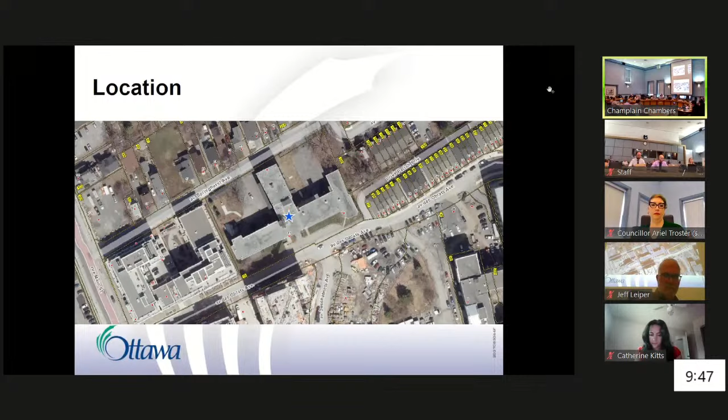In terms of zoning, the property is split zoned as R4 UD with exception and holding symbol, and R5B with exception and holding symbol as well. This split zoning reflects the Old Ottawa East secondary plan's height schedule, ensuring proper transition to the properties to the north. The R4 portion permits a low-rise apartment building, and the R5 portion permits a mid-rise apartment building with a maximum height of 6 stories.

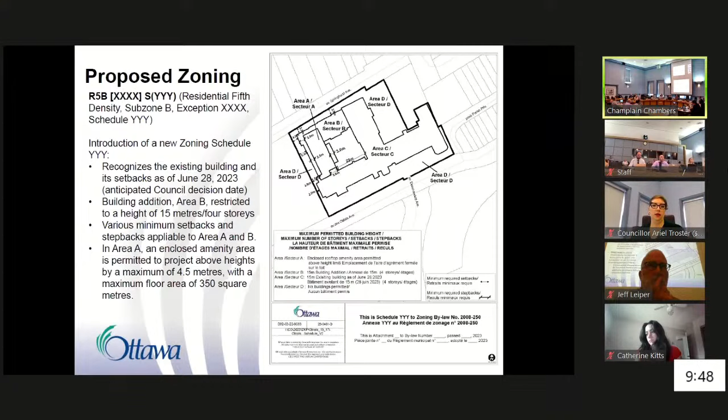The proposal includes redesignating to the closest fitting zoning, which is R5B, with an exception and schedule to regulate height, setbacks, and stepbacks.

The schedule will recognize all setbacks of the existing structure, shown as area C in the graphic. It will introduce the building addition shown as area B and under area A. The height of the entire building is a maximum of 15 meters, equating to a 4-story low-rise structure.

Area A is meant to demonstrate the permitted location of the proposed enclosed amenity space. The intention is to allow the amenity space to project to a maximum of 4.5 meters above the 4th floor, to a maximum floor area of 350 square meters.

The setbacks and stepbacks of this structure ensure that the rooftop structure is inset, reducing the impression of a larger building from the street and providing approximately 8 meters of separation to the western lot line, and about 10 to 11 meters of separation between the existing building and this rooftop structure.

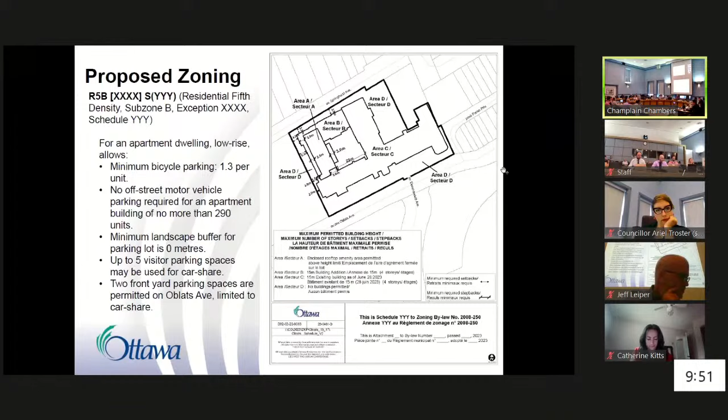The site is designated as neighborhood low-rise and neighborhood mid-rise within the Old Ottawa East Secondary Plan, Policy Area 3. This policy encourages a variety of residential building types and tenures, complementary building and landscape design, with an emphasis on appropriate transition to the low-rise residential neighborhoods to the north.

It is located within the urban transect policy area of the official plan, which encourages a more urban, mid to high density style development. It is also within the evolving neighborhood overlay, which supports low-rise intensification with a focus on supporting a 15-minute neighborhood. I've also included reference to an important section of the official plan that seeks to encourage the shift to a more sustainable and active mode of transportation.

This formed a crucial part of the recommendations for the reduction in parking on site. In essence, the policy states that we shall support active modes through reductions, and in some cases outright removal, of the parking requirements for sites within 800 meters walking distance to a transportation hub. In this case, the site is within proximity to Lees O-Train station.

Here is the current iteration of the site plan. The proposal is for the adaptive reuse of the former convent building and a 4-story addition on the northwest corner of the property, to allow for a 284-unit low-rise rental apartment building.

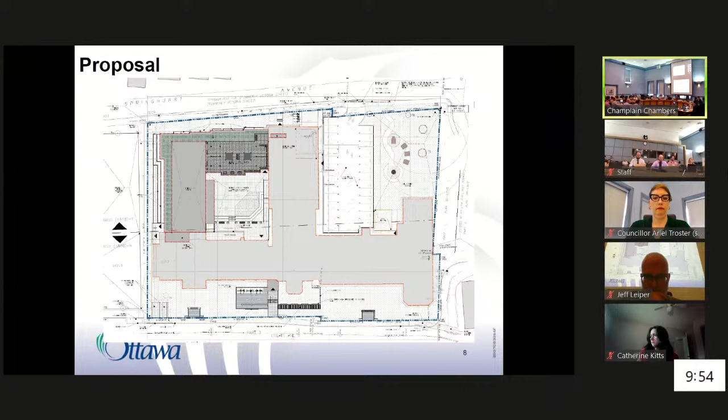There's a mid-block connection also located along the western property line, something the community was asking for and is being provided. A public park will be secured through the following site plan approval process, the design of which will be subject to further public participation.

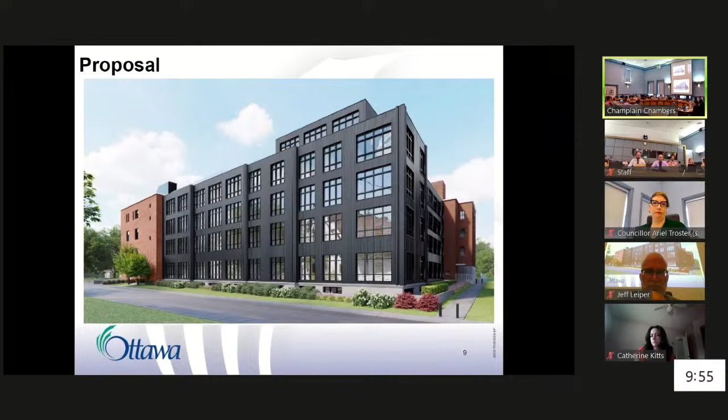Here's a view of the building addition from the Springhurst side, looking southeast, offering a good view of the mid-block connection leading to des Oblats. This perspective also shows how the amenity structure will look from street level, being set back quite significantly.

The applicant and ownership team has agreed to a comprehensive transportation demand management strategy meant to encourage alternative modes of travel, to offset the pressures that would be caused by not providing any parking. These measures include a bike parking rate that exceeds the number of bedrooms at 1.3 spaces per unit, 10 bicycles available for rental, and a preloaded Presto card for tenants upon execution of a lease within the first year, the value of which will allow for a monthly pass and also cover the cost of the Presto card itself.

A property manager will be available 24 hours a day to monitor the visitor parking lot and offer concierge service to residents for travel directions and advice. There will be 2 permanent car share spaces on des Oblats, and the ability for 5 of the visitor parking spaces to be used for car share on a need-to basis.

Finally, there will be a notice, something that's standard within our site plan agreements whenever there's parking pressures or reductions in parking — a notice in each lease agreement notifying tenants that parking is not available on site and that on-street parking is not a viable option for them.

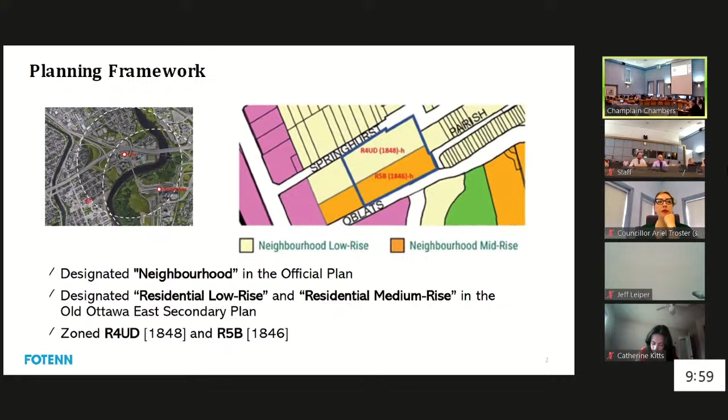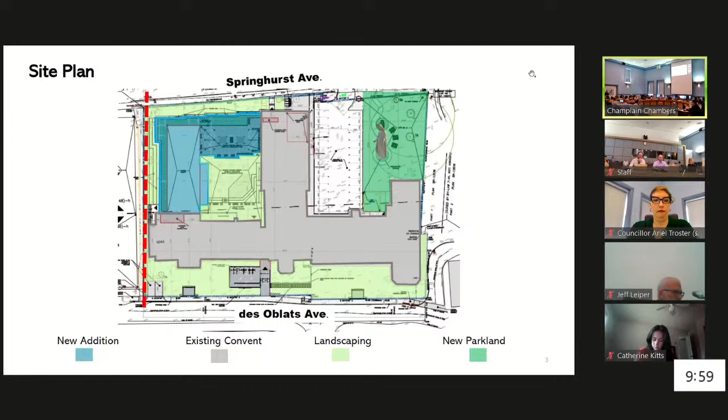The zoning amendments requested today will remove the holding provisions and create a site-specific zone for this project, one that recognizes the uniqueness of this redevelopment. The site will no longer be dual zoned and a park will be set aside as open space. The proposed building setbacks consider the existing setbacks of the convent, and the addition aligns with the current requirements of the R4 UD zone, which is what's in place today, where a side yard is supposed to be 1.5 meters. The addition is set back 4 meters.

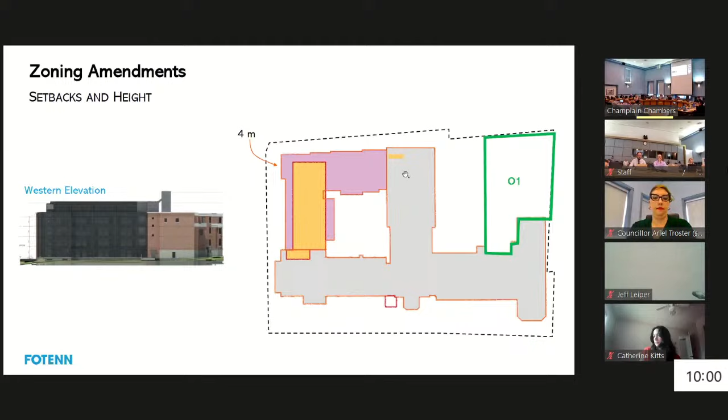John did go through this. These are the parking TDM measures, so I visualized it a little bit on this screen.

But as indicated, we are looking for a reduction of no resident spaces. However, we are meeting the visitor requirement.

We did look at providing underground parking. However, in addition to cost, it also would have a reduced footprint as it could not be provided under the existing convent, and with the parkland, it can't be under that as well. So the amount of parking that could be provided by underground would not meet the zoning.

Therefore, we can argue that in some cases, providing some resident spots gives hope to people moving in that a spot might open up, and they would therefore park on side streets until the opportunity came available. So we decided to eliminate that opportunity from the beginning, so people moving in know that they will never be able to park on site. A notice on title and in their leases would indicate that street parking is not a viable option.

So the comprehensive demand management strategies that John has gone through are now visualized. The parking rate exceeds the total number of bedrooms proposed on the site. So as opposed to unit, we're doing it by bedroom, and that equals 1.3 per unit.

There's indoor spaces with a dedicated elevator to bring those up through the block connection. There are 10 rental bicycles that will be made available for those that don't have a bike. There's car share spaces along des Oblats.

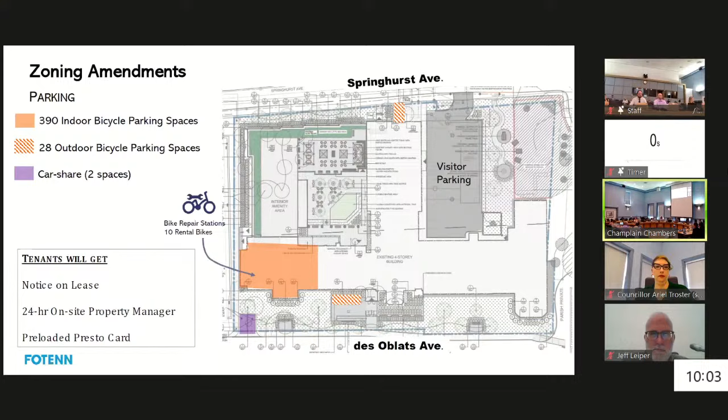So, last slide please. Hopefully we have demonstrated that this adapted convent and new addition aligns with the policies of the official plan, creating a pedestrian-friendly environment with reduced parking to encourage residents to utilize the more sustainable forms of transportation that exist. The development will add diversity to an existing unit mix and contribute to an already viable, example-setting 15-minute community of Old Ottawa East.

So with that, I'm going to thank you for your time and we welcome any questions. We are joined by the architects, Woodman Architecture. We've got representatives from Smart Living and Forum - it's a joint partnership for this project - as well as CGH, our transportation consultants on this file. Thank you.

Thank you very much, and there are questions for you. The first are coming from Councillor Curry.

Thank you, Mr. Chair. Overall, I like this. I read all the comments from the community - they're not happy about the parking situation predominantly. But you're right in between Ottawa U and St. Paul. There's only one really close little elementary school.

I guess my question is, would these units not be geared towards university students or a particular type of person, not a family necessarily? There's also Viscount Alexander over there, but that's a small little school, and Lady Evelyn is just alternative. I can't see families, yet I'm hearing 3 bedrooms, so maybe there'll be students renting, multiple students.

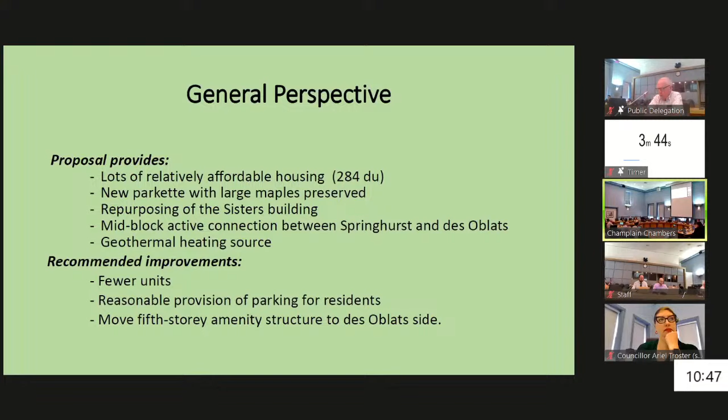Density: the community believes the proposal plans for too many units. The entire area, which includes 15 des Oblats, was planned for 1,000 dwelling units, and this target has already been exceeded. The 284 units in this proposed development alone would represent almost 30% of that target. Services for this area, including the redesigned Main Street and the street system within Greystone, were designed based on the target of 1,000 additional units. Exceeding this target will place a future strain on the services and road network already implemented. We urge the committee to direct staff to work with the developer to provide a reduced number of dwelling units.

Residential parking. Next slide. The existing zoning requires 136 residential parking spots, yet the developers are proposing to provide zero. As has been mentioned, it's inconceivable that no one in the 284 residential units will own a car and be looking for on-street parking within the community. Indeed, the developer's own consultant recognizes there will be pressure for on-street parking and suggests it be dealt with in a way the community finds condescending and offensive.

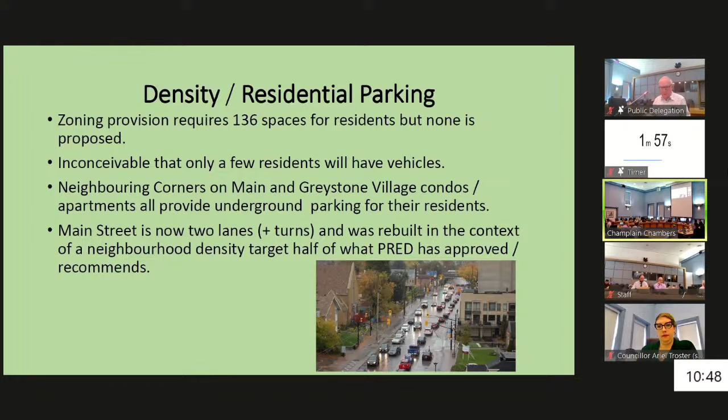Next slide. The consultant's report suggests the existing community will need to evolve and adapt their mode of travel to reflect the path the city has charted forward, with a decrease in auto modes and an increase in pedestrian, cycling, and transit trips. The community of Old Ottawa East has already embraced active transportation. We now have 4 OC Transpo bus routes serving the community where there used to be 1. We are blessed with a well-used network of cycling lanes on both sides of Main Street, along the canal and the Rideau River, including the Flora footbridge. It is inequitable to require the community to, quote, suck it up, unquote, and absorb the entire burden of the extra parking generated by this development.

The consultants have already admitted it is possible to provide some residential parking with reconfiguration of their design. So we would urge the committee to direct staff to work with the developer to provide some residential parking, which must be either below grade or obscured from view.

Next slide. Location of the amenity space. The current 4-story building is zoned for 4 stories. To the north on Springhurst and— okay, never mind that. Sorry about that, Mr. Chair.

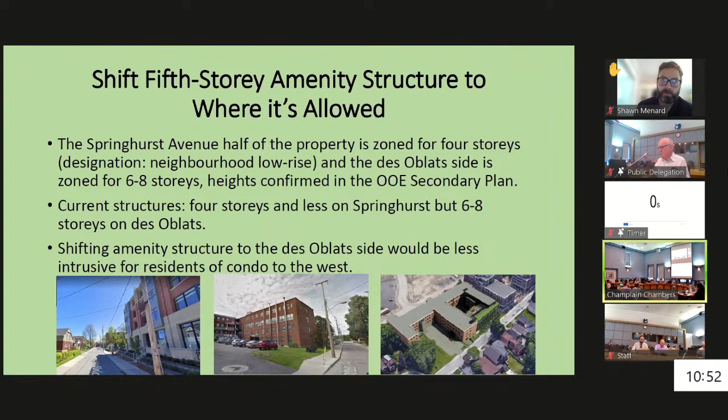Thanks so much, Chair. I just wanted to thank Ron and the Community Association for the work you've done on this — you've helped improve it a lot. I know the pathway has been an important issue, the adaptive reuse of the building, and the keeping of a public park that'll be created here. I know the community's been instrumental in that work, and I think you've been reasonable, in terms of a balance of approach. So just wanted to say thank you. And if there's one thing, the one big piece you would really want to see here — I know you mentioned 3, but if there's one you had to pick, which one would it be?

Can you repeat that, please, Councillor? I was just saying that if there's one thing in particular you would really like to see changed, that we can continue working with the applicant on towards council and beyond, what would that be?

I would suggest that working at reducing the number of units would also help address the parking issue. If the number of units were reduced, residential parking could be included under the new wings being proposed. So that would solve 2 of those 3 major problems. Thank you very much, Chair.